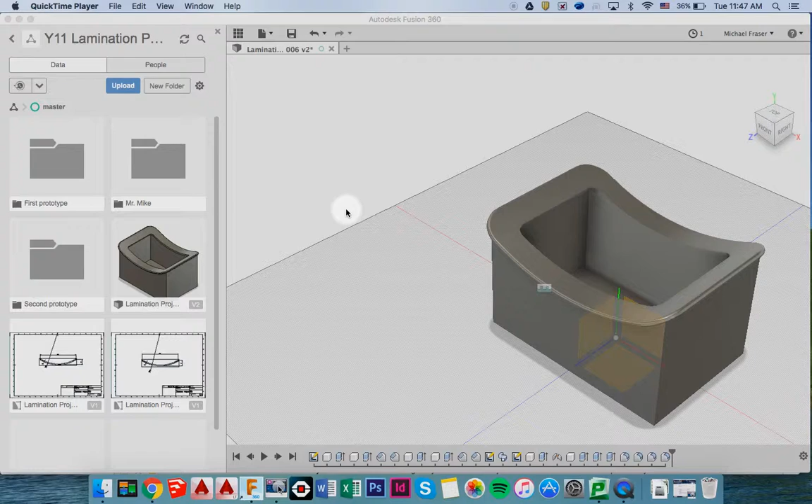Right, here we are for the tutorial looking at how we're going to laser cut the top part of the laminated box. So you can see, because this surface is curved, when we cut it and lay it flat to laser cut it, it's going to be a lot longer than when we just look down on top, because the curved edge actually adds extra length.

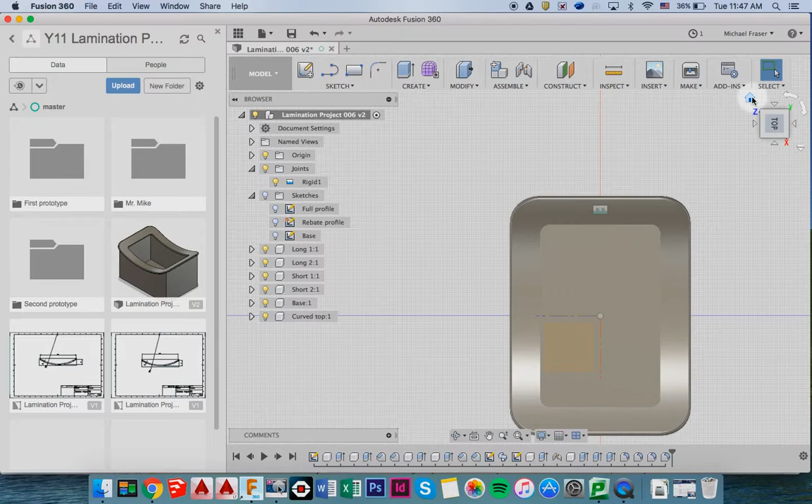So to do this drawing, we need to make a bit more room to start with. We need to turn off all our views, all our components. And then we're going to turn on the full profile here, and we're going to two-finger click on it to go Edit Sketch.

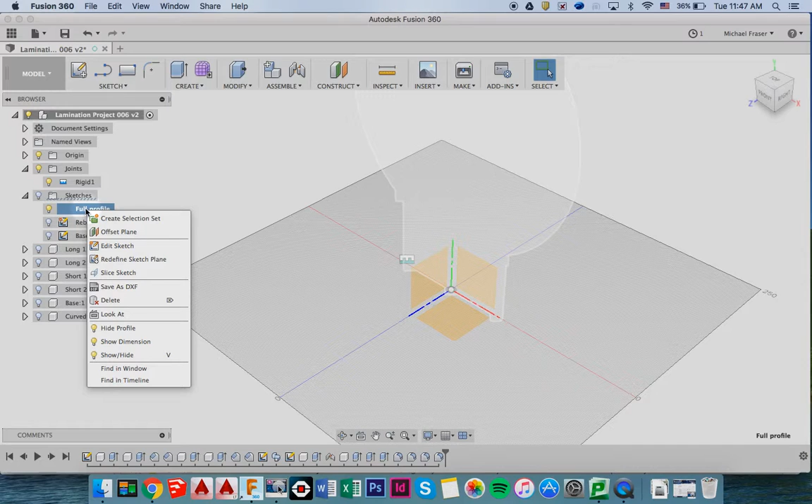And then let's swing that round to the front. Now the part that we want to be able to measure is from this point here, right around the base of the curve to this point here. So to do that, we're going to trim off this extra bit of line, and then we can use the measuring tools to do that.

Hopefully you can see I've got this new cursor, and when I click it goes red, and if I two-finger click it goes green. Also if I type something like down there, press escape, it comes up on the screen as well. Hopefully those are some little indicators that you might find a bit more helpful when you're doing the tutorials too.

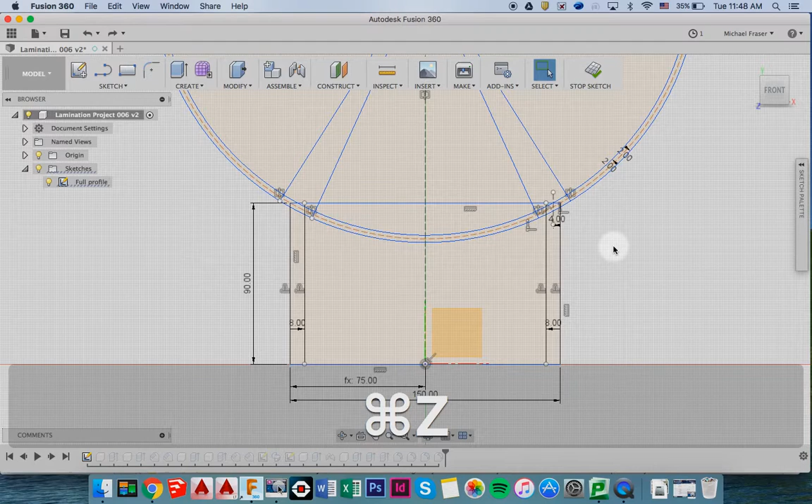Right, so we need to trim off that extra line, so T for trim. Oh, it's already done it. Let's undo it so you can have a look. Press escape, T for trim, highlight that line there, oh, that line there, and trim it off.

Now we want to measure this bottom line, so we're going to click I. You can go up to here and look down, but the shortcut is I for measure, and there we go. And if you scroll down here, you can see it's given us a length of 170.163. These other two measurements we don't need.

Now, that might sound crazy, going to 3 decimal points, and because we're working with wood, we don't really need to work to that level of accuracy. But we are going to write that number down and include all the decimal points, because if we need to use this sketch later in the drawing, it's good to have that high level of accuracy. If we don't, things might get complicated with our sketch.

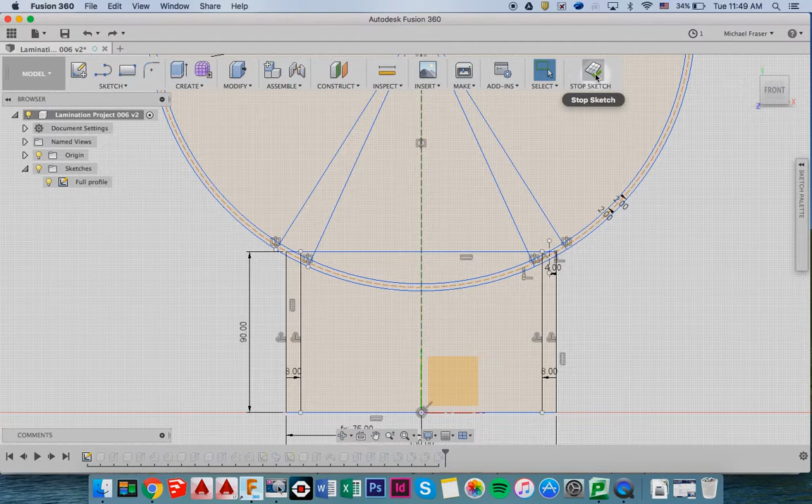So I'm writing that down on a piece of scrap paper, 170.163, and then I'm going to undo that, Command Z, to undo all the work I've done. I'm going to stop the sketch, go back to home, and start a new sketch.

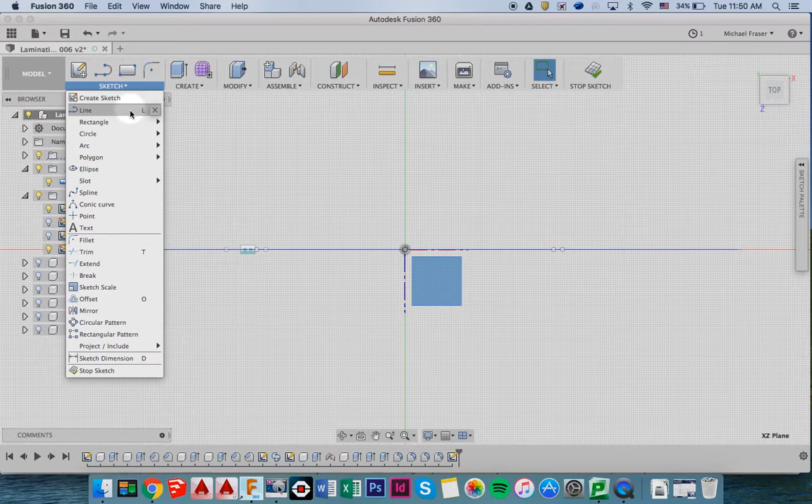Now I'm going to place the sketch on the top surface there, and we're going to start with a rectangle, a center point rectangle, and that'll click right in the center of the drawing.

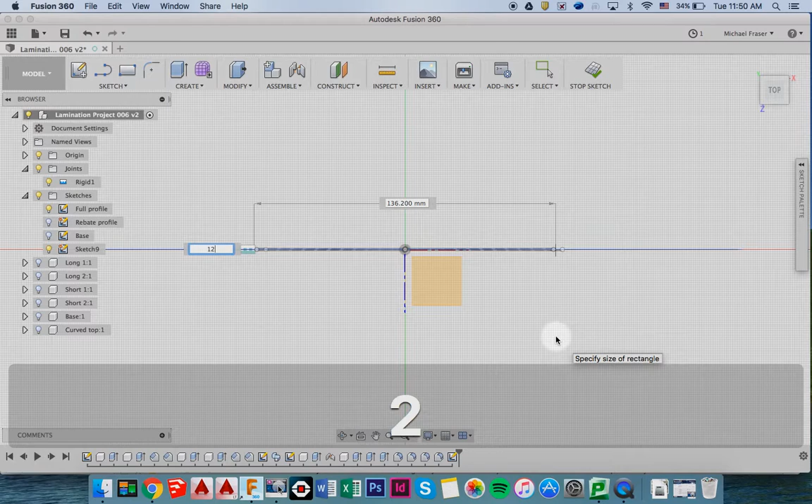Now the height of the box that we need is, well, the height of the wooden box we've made is 100 millimeters, so we're going to do 100, and then we're going to add 10 millimeters clearance on both sides, so that's 120, 100 plus 10 plus 10. And then the width is the number we've written down, 170.163. So that's the overall box size for our laser cut.

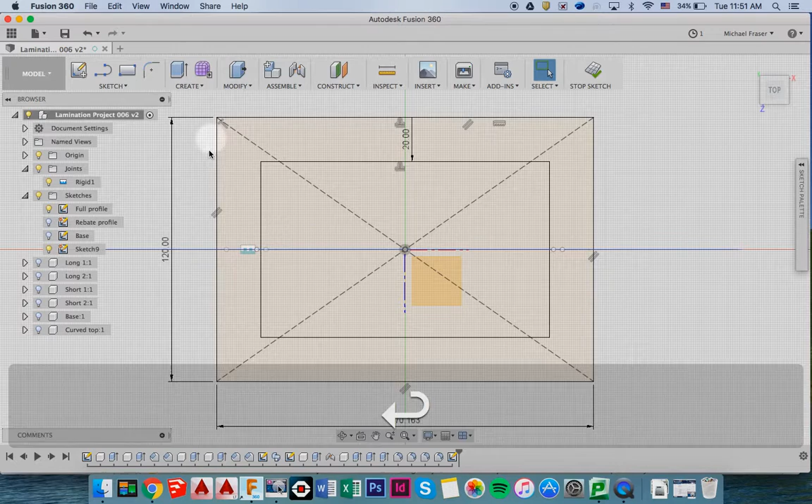Now we're going to offset, so O for offset, and click on here, and we're offsetting by 20. Now that's gone the wrong way, so we'll make that a negative 20. And this is the box that we want for the lid. We're going to curve the corners, so we can go into our sketch menu, and you can see under fillet here.

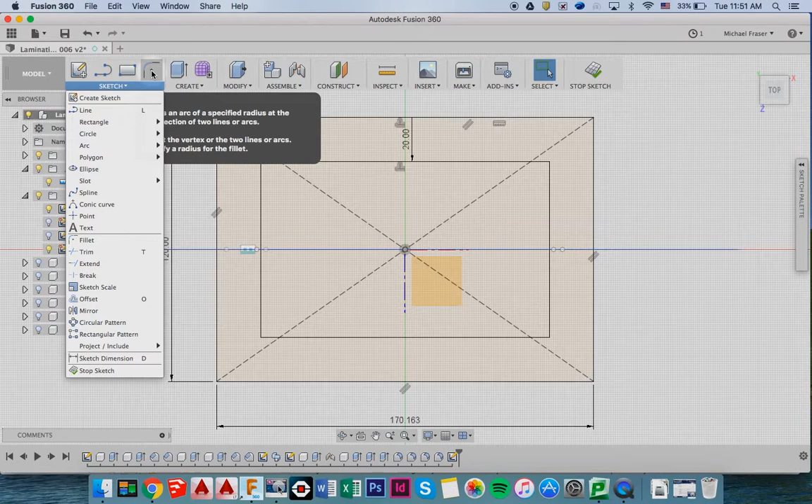Fillet's a tool we're going to use a lot. Under some of the tools, see how there's a little up arrow? I've already used it with fillet, and it's put it up here in the toolbar. Fillet's quite a useful tool, so I suggest you send yours up into the toolbar as well. I'm going to click on fillet, then come in here and click on that corner, and we're just going to round those a small amount—5 millimeters is plenty.

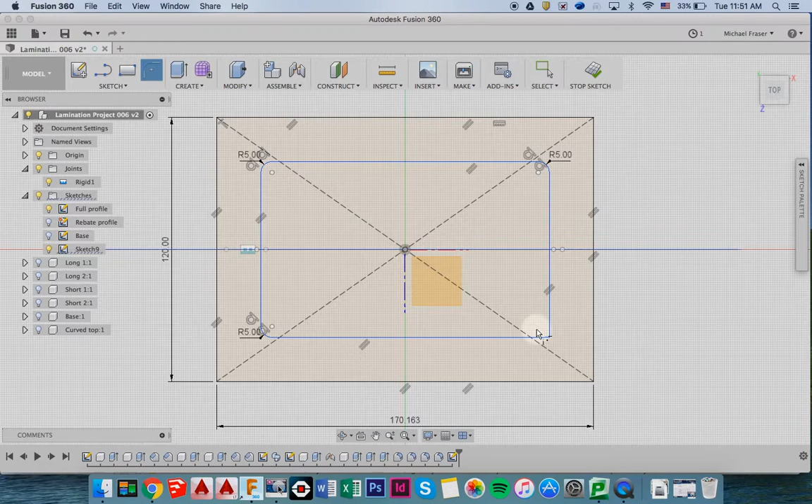And then we'll fillet these outside corners as well. Now I'm going to make that 16.

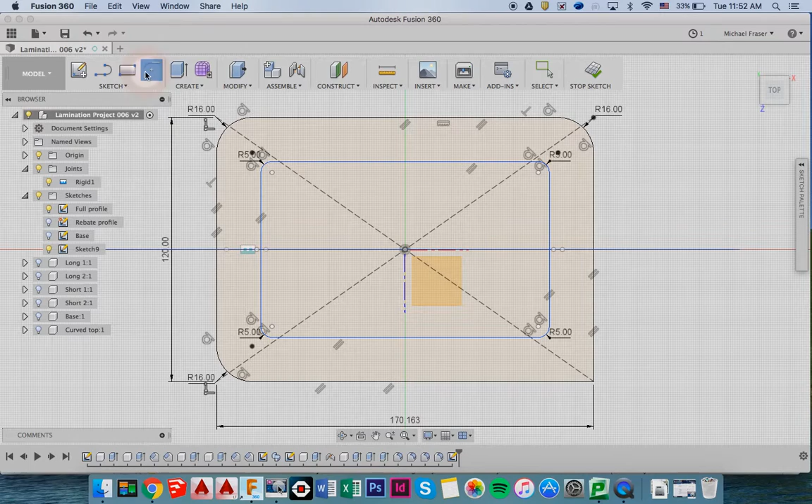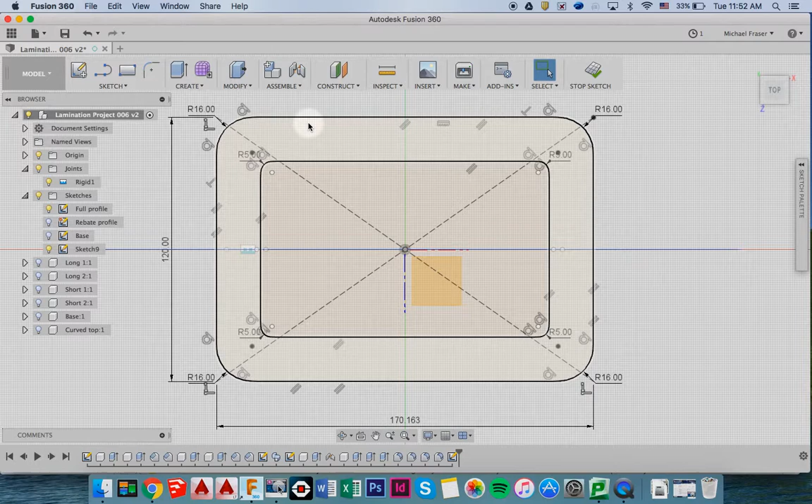So that's the shape that we want to cut. I am going to make one small change to it because I know this outside edge is going to be a very tight fit on the box. So what we're going to do is offset that whole edge by 2 millimeters. That's just going to give us enough room that if we need to sand it down, or if our box isn't quite accurate, we've got a little bit of additional room to play with. So we'll go around and delete that line that was there from our original box.

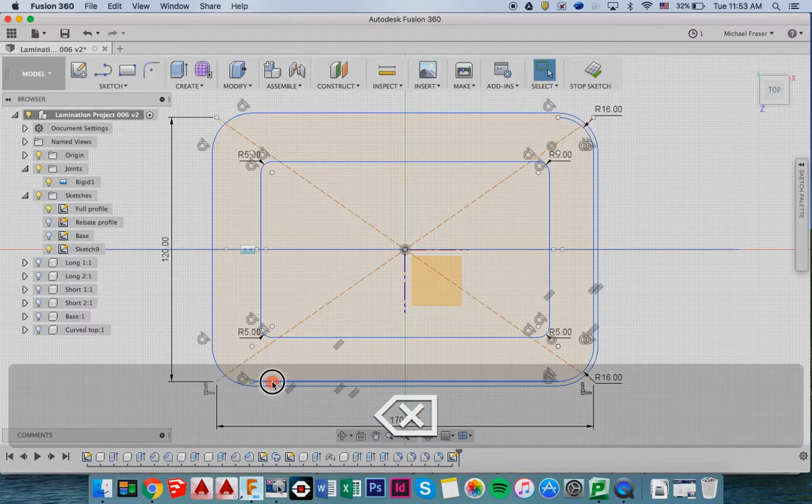So that's the overall shape of the top of the box. Now we just need to put the tabs in the middle there to hold it all together and put the bolts through when we're gluing it up.

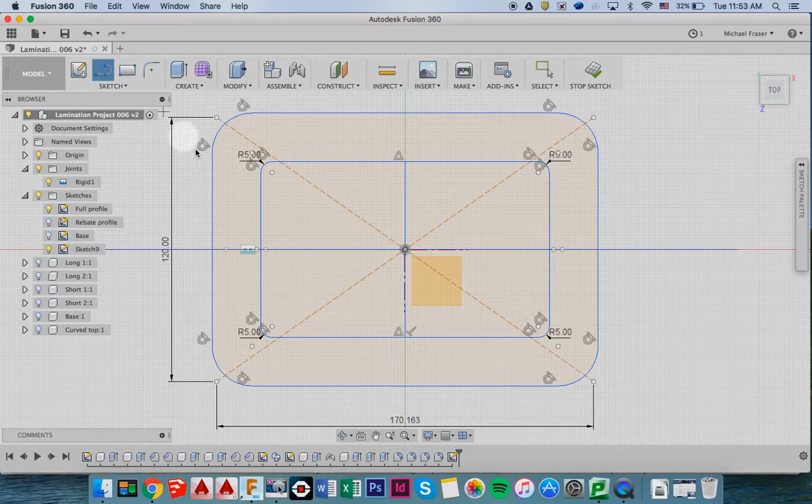So we're going to use the line tool, press the line from there to there, and then we can offset that line. O for offset. Oops. We're going to offset it by maybe 6 millimeters, and then we'll offset it again. Oh, that's a 0, not an O. Excuse me, press escape. O, offset that one, and this time go -6.

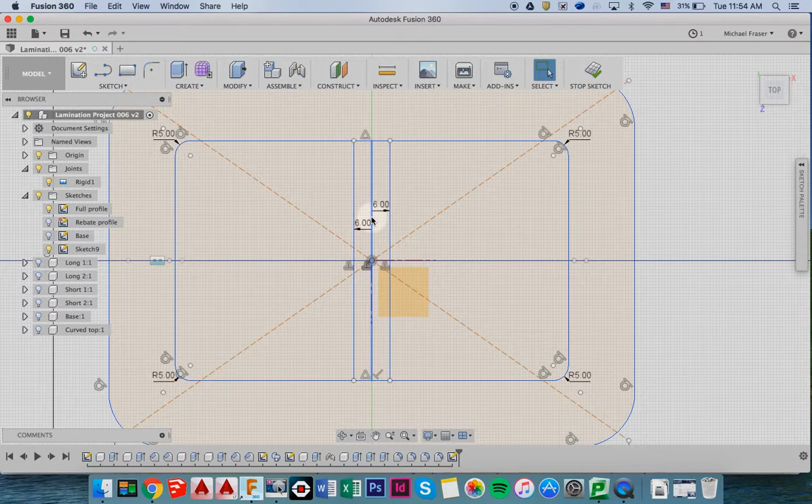Then we just want to draw a circle on this line here, so C for circle, place a center point, drag it. The diameter of this is 5, press enter. Another circle down here.

And zoom in on this. We're going to dimension from the center of this to the center of here so that we can get the bolt spacing equal. So D for dimension, hover over the white center, down to the horizontal line and drag it out. Let's make that 12 millimeters. Do the same again here.

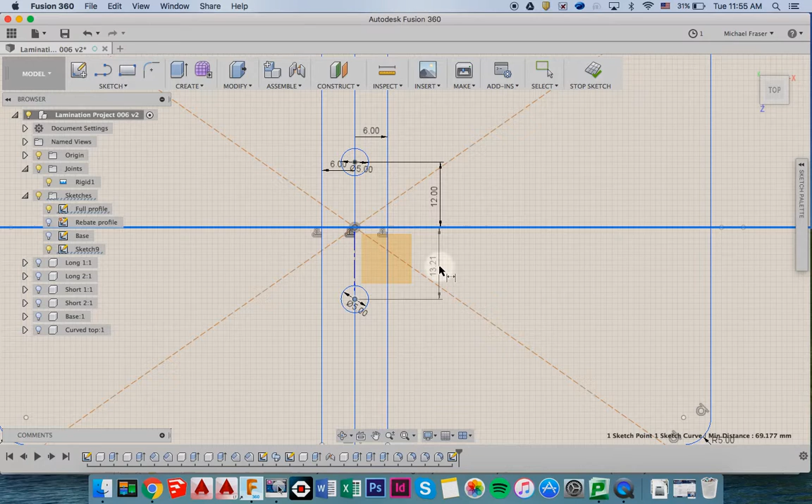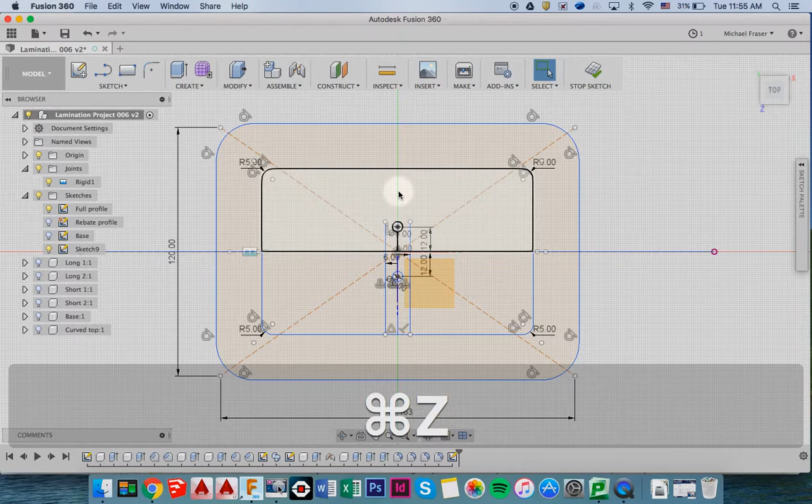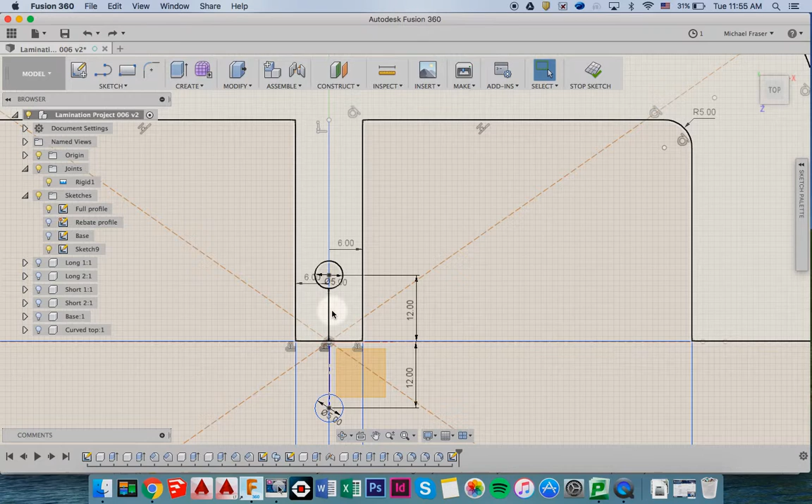Now you've got those holes symmetrical, so it doesn't matter whether the piece of plywood goes upside down or not. And last of all, we're going to trim out the lines we don't need. T for trim.

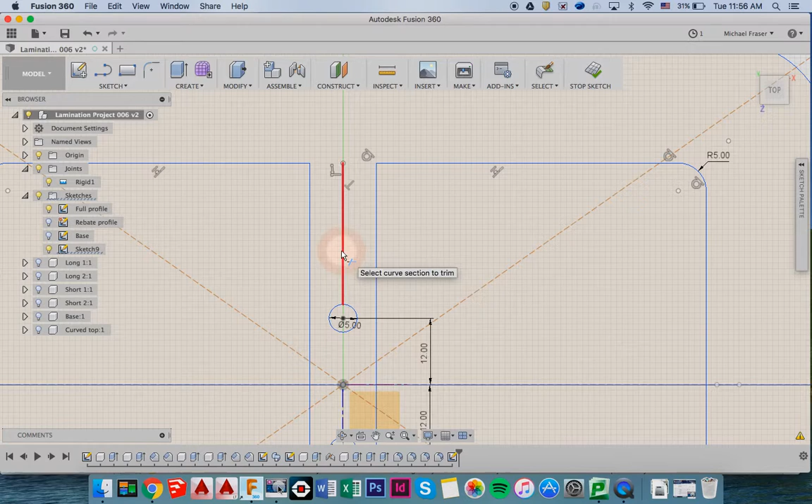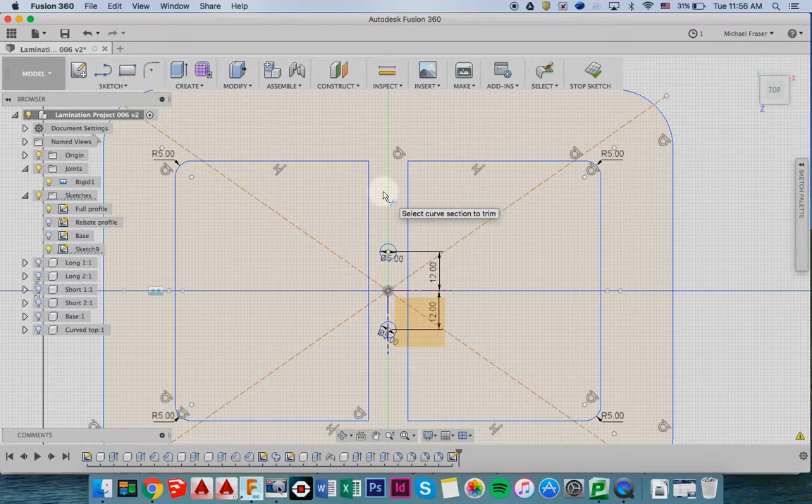Now you might have seen that I had that little problem there with the whole thing spinning around on me. It seems to be some sort of error with Fusion at the moment, and it depends on what order you trim. So if you're having trouble with your trim, just undo the step and go back and try trimming it in a different order. The order of trim seems to be, for some reason, a little bit sensitive at the moment. Right, once you've got to there, you can stop your sketch.

And this is the sketch that we've been working on here, sketch 9. Let's label it laser cut top. And then we want to two finger click on that and go save as DXF. I'm just going to save it to my desktop for now. Later on we can upload it to our Google folder.

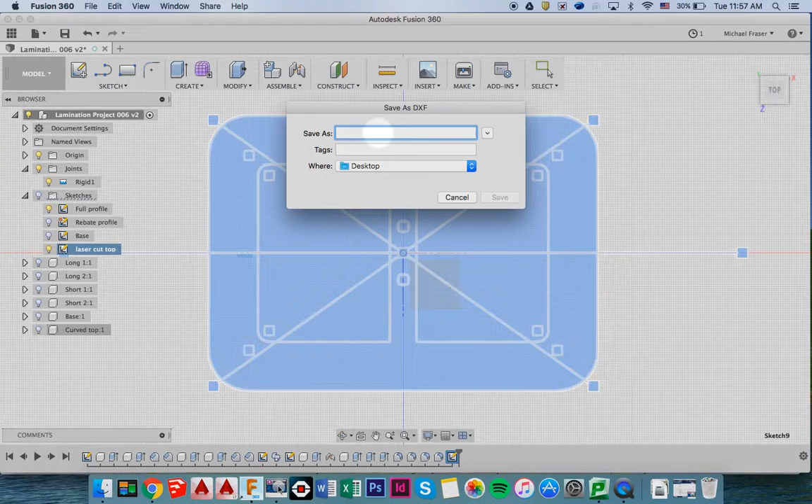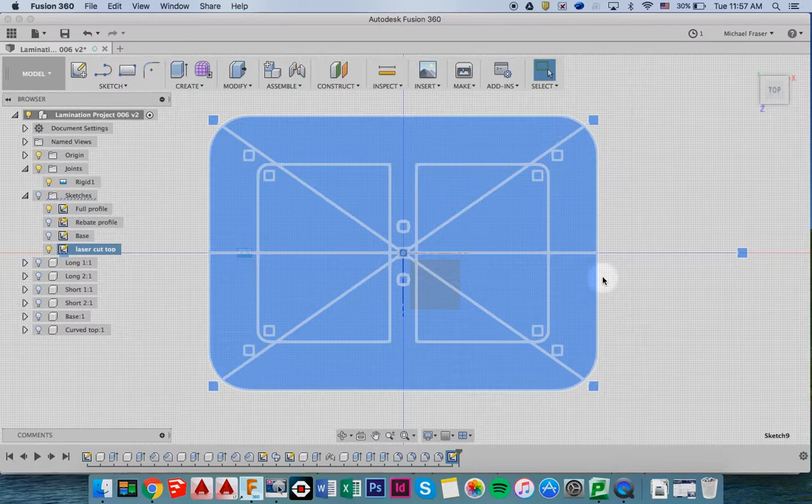So we call this Lamination top, and this is about my 5th effort, so 005, and save it as a DXF to the desktop. Now that DXF is in exactly the right format to go straight to the laser cutter so that your part can be laser cut. Okay, thank you for watching.